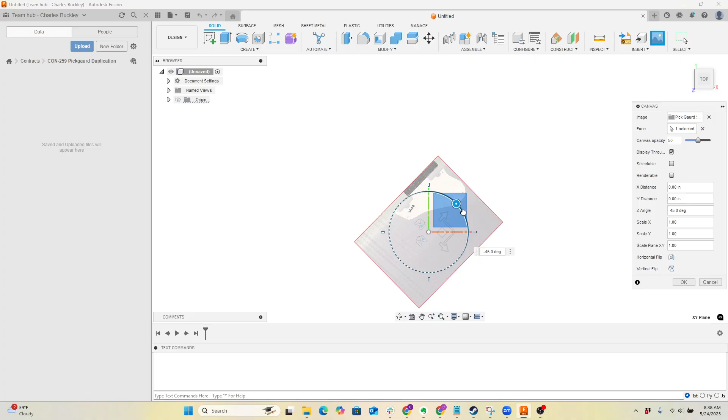I like to work off the top face, and how about in a natural orientation? I'm going to flip it for the fact that this would be left-handed. There we go. I scanned the back side of this so that the bevels won't show.

Now let's take a look at our scale. This is a decent quality scan, and I'm going to go ahead and average it across 2 inches. You can't do that for here, I haven't figured out how. So what we do is close this section, right-click here, and then click Calibrate.

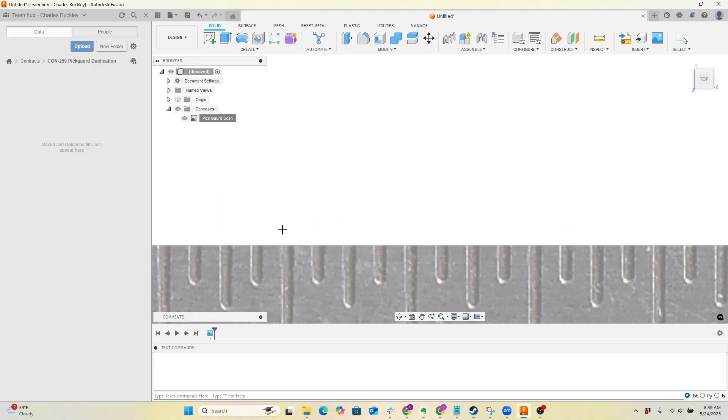And then I'll pick a spot on the inch, right in the center. We'll go over 2 inches, grab it in the center, and that is 2 inches. Now we've scaled this part.

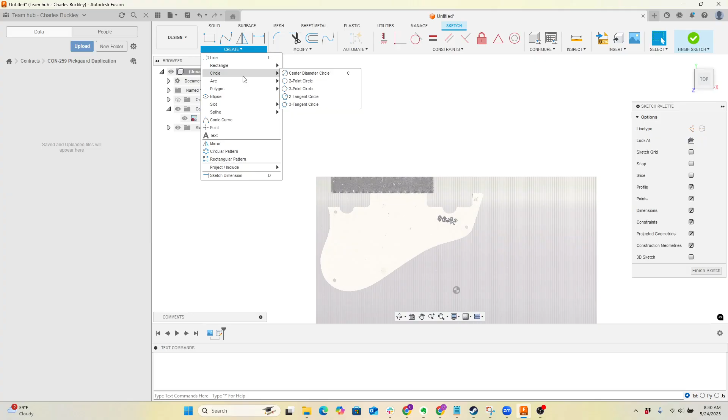From here, we can start to trace and do the digitization. Depending on how critical the part is, will determine whether this is a parametric model or freehand. If everything needs to be really well defined, or if we can get away with some other things that we wouldn't normally do in engineering.

So it's about a balance of time and perfection. We can't be perfect. I'm going to often find these dimensions are dead on a specific size, so it is here. Okay.

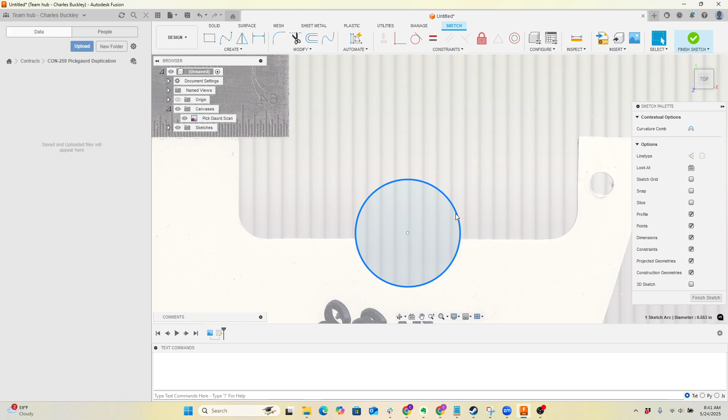So roughly right there. And then we can start working our way through the drawing. Maybe I'd create a mirror line and mirror these dimensions that look copied.

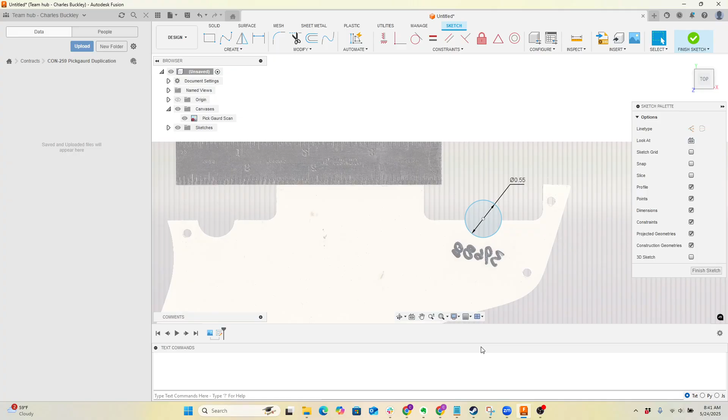I do try and avoid using splines. Not that we can't, but they can create difficult geometries later. So I'd much prefer arcs and straight line sections rather than using the spline tool. So we'd work our way through this document.

There's another trick here: if you don't dimension everything off the origin, so we put the origin here. Maybe we would move - before we got here, let's just undo this and go back to the scaling of the sketch.

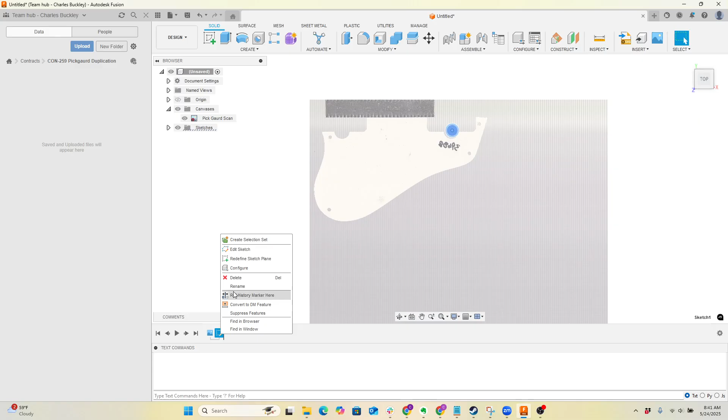Oh, it's not gonna let me delete. There we go. Maybe before we even draw on the sketch, we're going to put one of the corners on the origin, and then we have something to reference off of that makes sense.

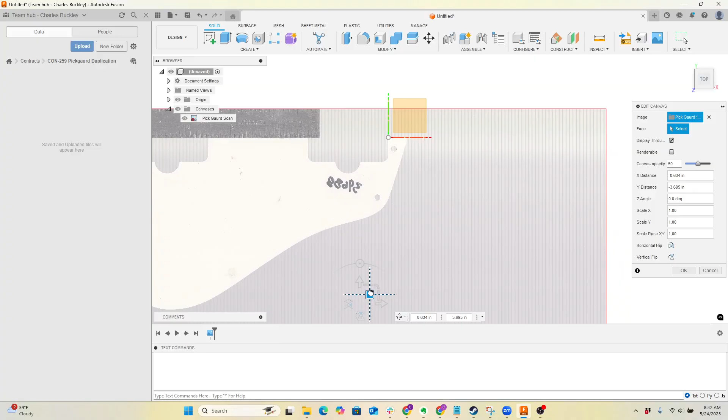So we could say that it's the centerpiece or one of these points. I'd rather do something that's mechanical rather than artsy. So we could say that point right there is - and sometimes if you want to get this dead on something, you have to come over here and mess with it here.

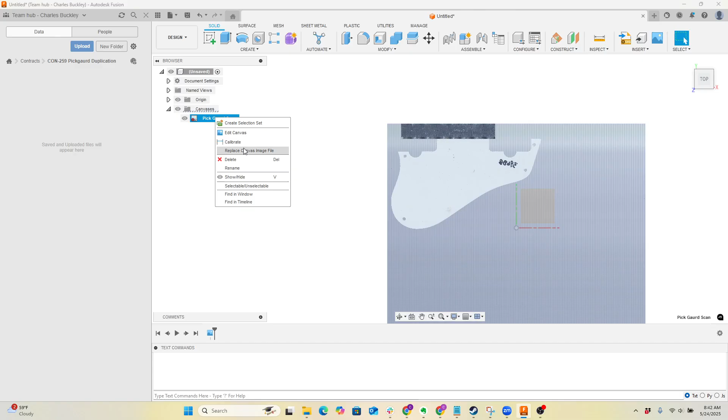But it gets really finicky, it doesn't like that. So if you really wanted to get it close, you'd have to start typing in numbers and remembering things. But for this, as critical as it's going to be, it's not horribly critical. But we do have a scaled sketch, which is really important.

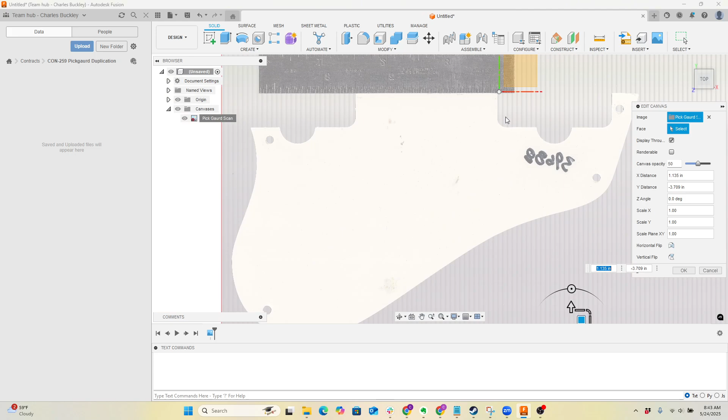We're getting close. And about here is where I'd have to start typing in the numbers. So, 161.

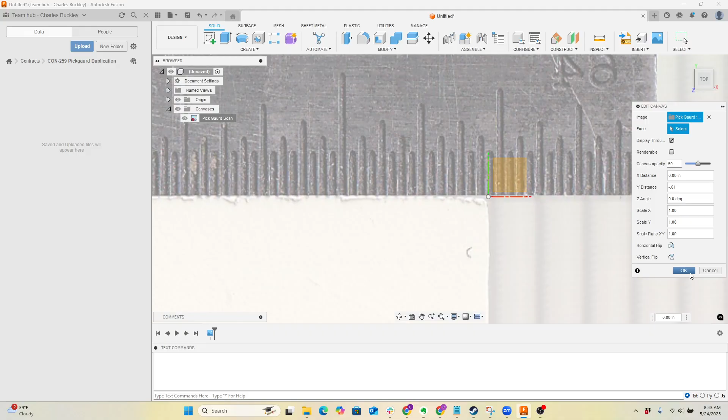And then I think I can just do it here, so y minus... I'm okay with that. So there we go, we have a scaled sketch, we have an origin, and we could start drawing and make this part.

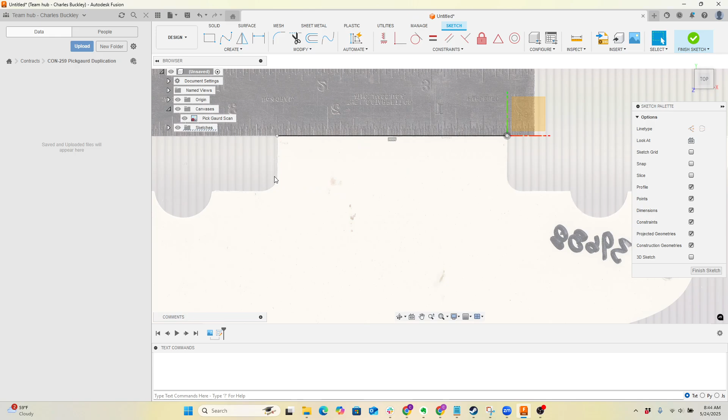So we could start here, just work our way around. Often we find that values are either metric or they're not, so you can sometimes figure out what the dimension was supposed to be based on the dimension. But in this case, they don't look to be very much on there.

This is a vertical, so we can start adding some constraints. There's gonna be another one over here. Maybe we can start applying some symmetry at this point. I think we can do that instead, and we can start just working through this whole thing.

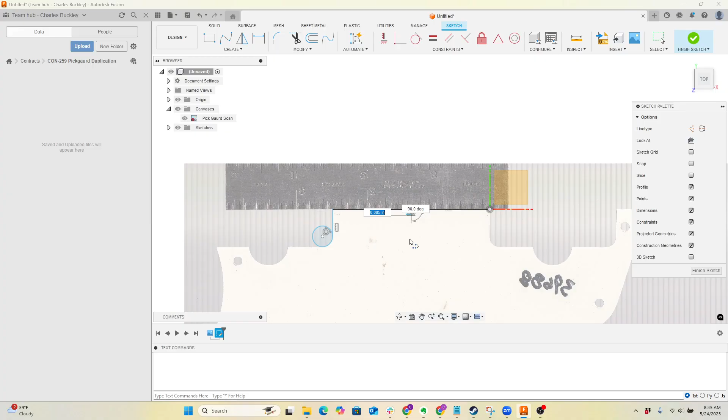There's a center line right here between those two. We could start - you don't have to do it perfect, but I don't want it freehand drawn. So we work through the part.

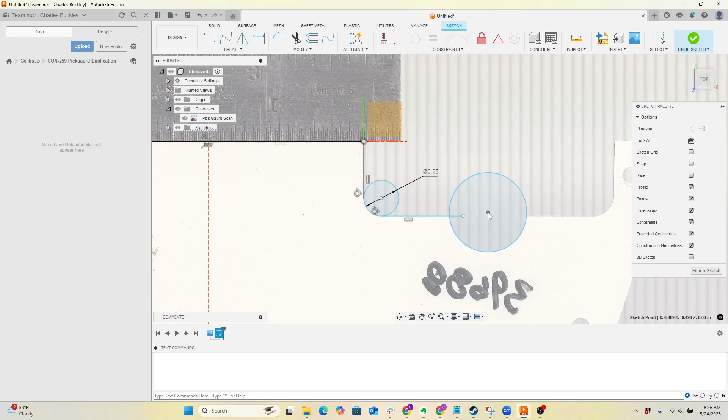I'm just going to add a construction line.

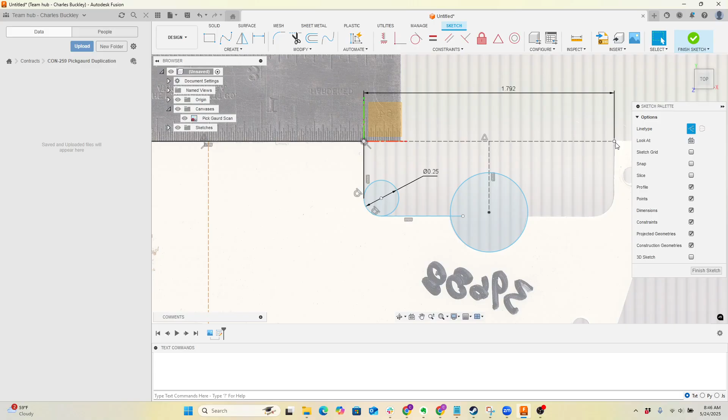I think this side is actually bent out a little bit, and you can see that this is at an angle, so I think that this is probably the true line here. So we're going to delete that. Put it right there.

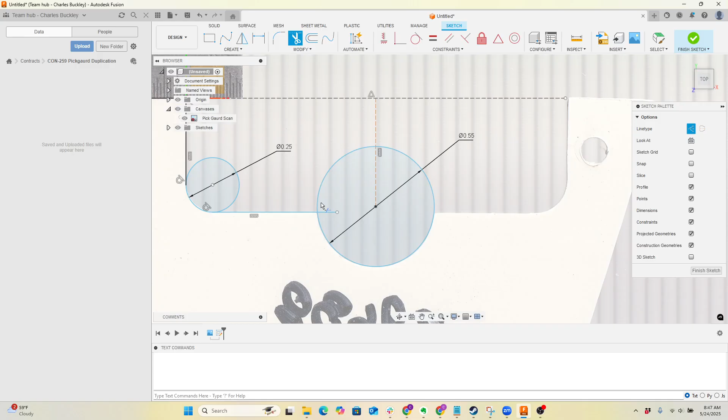All right, that's probably close enough. We'll trim - now we have our connection. And now if we have something that we don't know how to define, there is a way to define it.

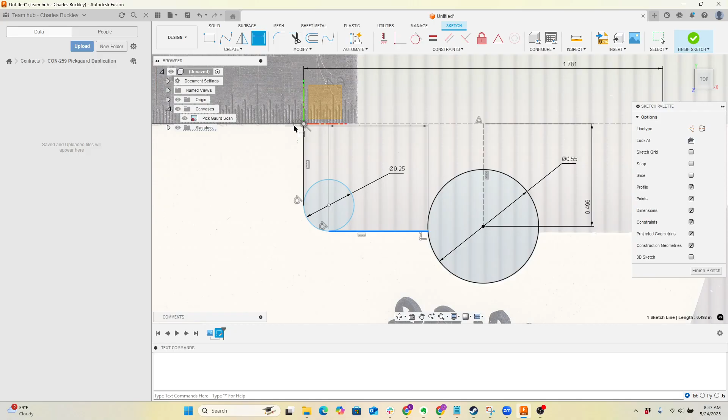So let's say this guy here, we don't have. Now obviously we can make this dimension from here to here, and we could dimension it. And now we're getting our fully defined sketch, and we can copy all these dimensions over to this side, and they should match.

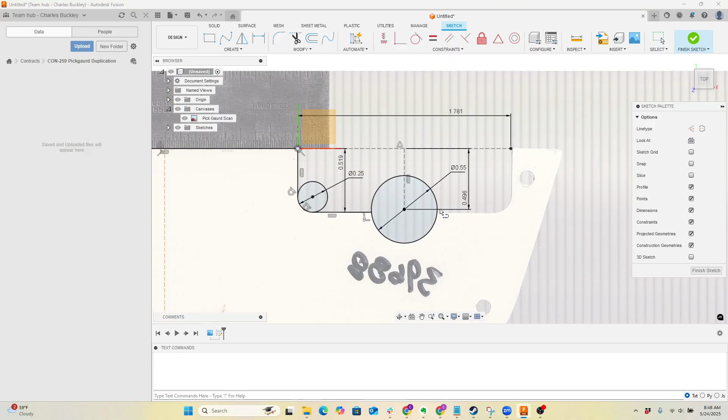We'll keep going, so we'll start rebuilding the part this way. This is collinear with that, and likewise, we'll start rebuilding the geometry of the part all the way around.

I was going to show you another trick on how to fix something just in place without any reference. So let's say it's a large arc or something that's very awkward to constrain. Once we know these holes here, they will be .125 because I know later that's the drill size we're going to use.

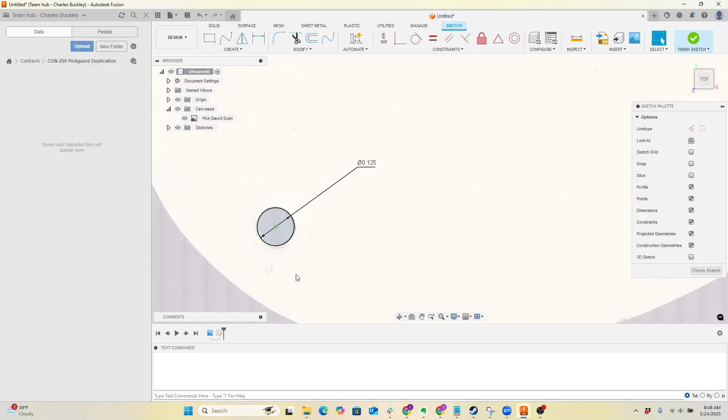We can use this fix option, and it will prevent it from being able to move around, and that gets really helpful in these big arcs, as you're trying to get stuff to fit together nice and smooth. Sometimes that's a lot easier than trying to define them with the geometry.

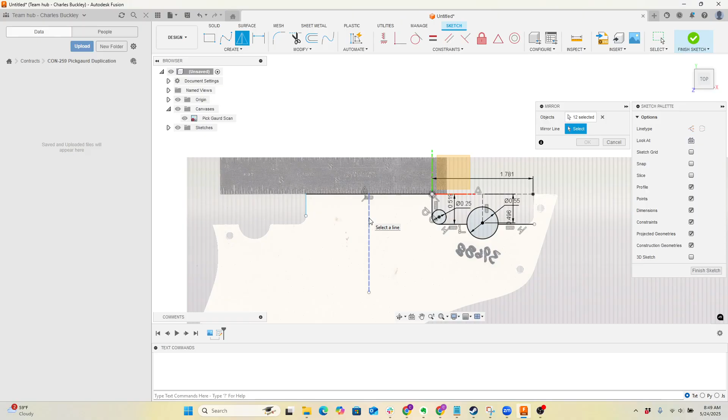And then here I'll show you the mirror trick. So we have that will mirror over here, and all those lines will go over there. So that should be defined, though.

Oh, because this distance is not defined, and it looks like we are missing a couple. All right, I think there's an extra line there. There we go.

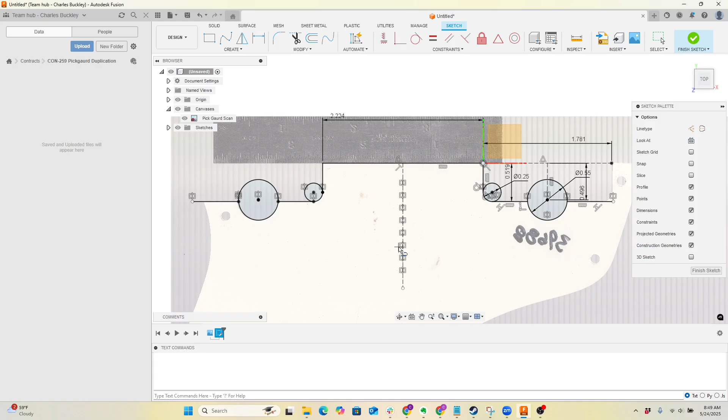So we start working through things and then around this outside, and then we'll make the part and extrude it.